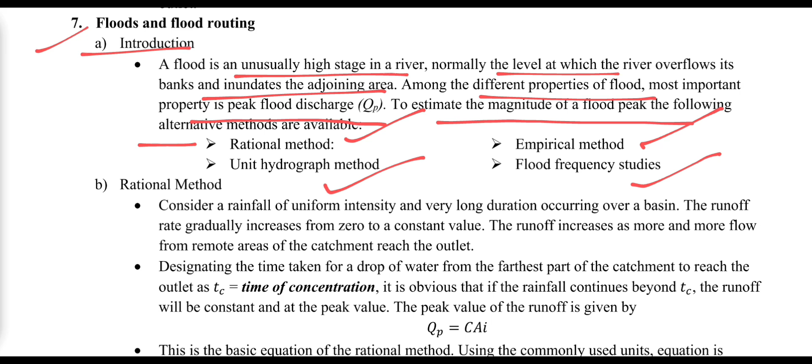To estimate the magnitude of the flood peak, the following alternative methods are available: first the rational method, unit hydrograph method, some other empirical methods, and flood frequency studies. These are the four types of methods available in order to estimate the flood peak, that is, the peak discharge.

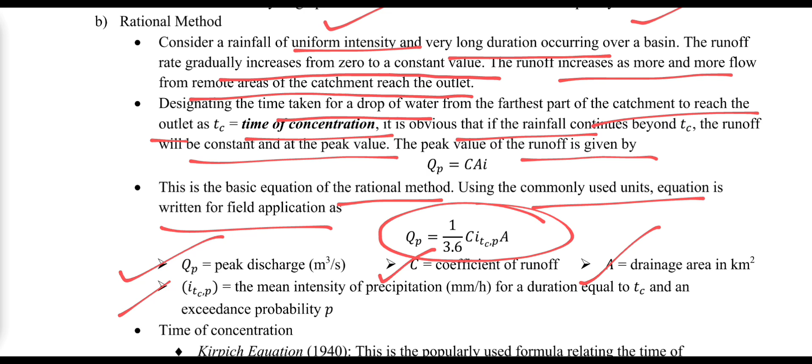Using the commonly used units, the equation is written for field application as follows. Here QP is the peak discharge in cubic meters per second, C is the coefficient of runoff, A is the drainage area or catchment area in square kilometers, and ITC,P is the mean intensity of precipitation in mm per hour for a duration equal to TC and an exceedance probability of P. This is about the rational method.

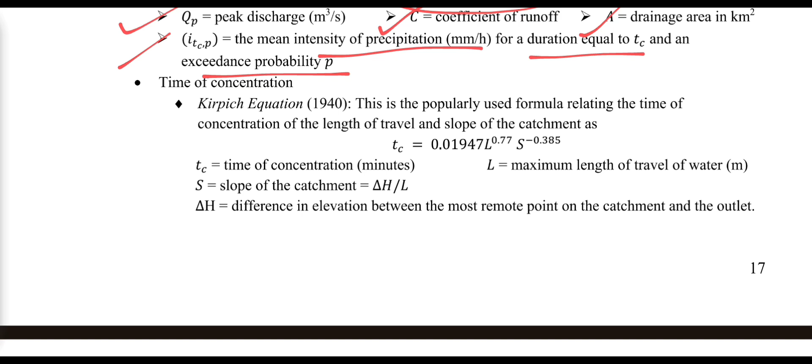Next, time of concentration: as we discussed in yesterday's class, we have the Kirpich equation to find the time of concentration. This is the popularly used formula relating the time of concentration to the length of travel and the slope of the catchment area. Here we go with the formula.

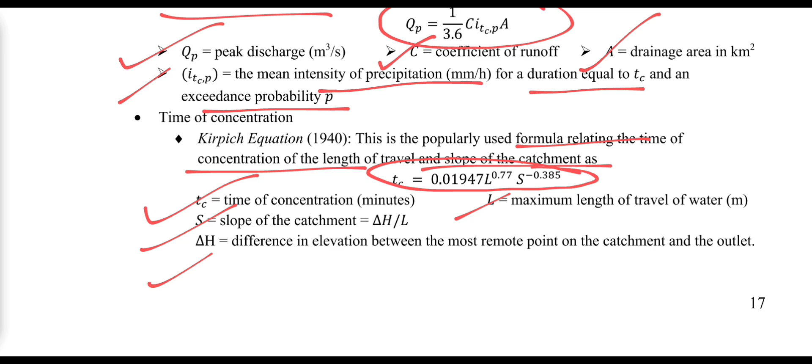This is the time of concentration formula as per the Kirpich equation, where TC is the time of concentration in minutes, S is the slope of the catchment, which is delta H by L, L is the maximum length of travel of the water in meters, and delta H is the difference in elevation between the most remote point on the catchment and the outlet.

Next, empirical formulas: in order to estimate the flood peak, we have some essentially regional formulas based on statistical correlations of the observed peak and important catchment properties. By far the simplest of the empirical relationships are those which relate flood peak to the drainage area in square kilometers. The empirical formulas include, first, Dickens formula, which is CD into A to the power of 3/4.

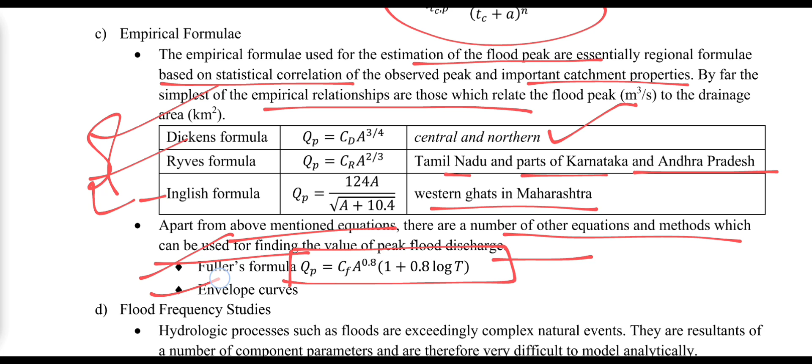Apart from the above mentioned equations, there are a number of other equations and methods which can be used for finding the value of the peak flood discharge. The Fuller's formula is QPK is equal to the given formula. Next, envelope curves. This is about the empirical formulas.

Next, flood frequency studies, the next method. In hydrologic processes, floods are exceedingly complex natural events. They are resultants of a number of component parameters and are therefore very difficult to model analytically.

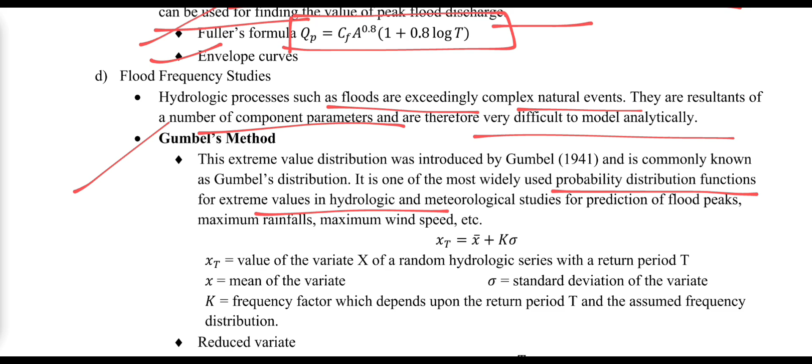This includes Gumbel's method. Generally, it is one of the most widely used probability distribution functions for extreme values in hydrologic and meteorological studies, for prediction of flood peaks, maximum rainfalls, and maximum wind speed, etc. We have to find this out.

Next, the statistical probability method. This method is suitable when a large amount of data is given and it is required to find the peak value of the discharge for a given period. The values of the annual maximum flood from a given catchment area for a large number of successive years constitute a hydrologic data series called the annual series.

The data are then arranged in decreasing order of magnitude. Then we find the probability P of each event being equal to or exceeded using plotting position equations. With the California formula, P is equal to M by N, where M is the order number of the event and N is the total number of events in the data.

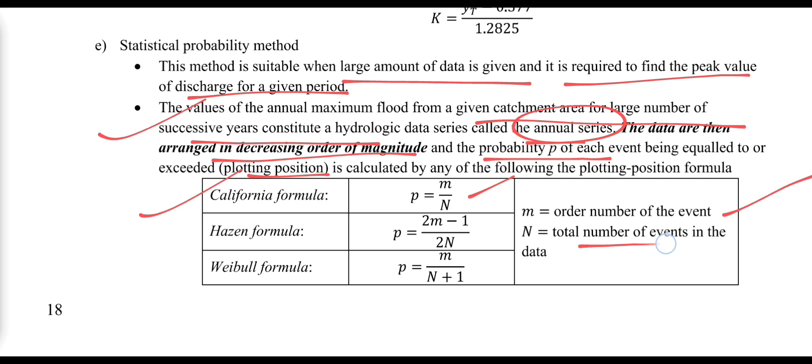With the Hazen formula, P is equal to 2M minus 1 by 2N. With the Weibull formula, P is equal to M by N plus 1. These are all equations. The recurrence interval, T, also known as the return period or frequency, is equal to 1 by P.

Next, reliability is the probability that a particular value of the flood is never equaled or exceeded in a time span of n years. The formula is R is equal to 1 minus 1 by T, whole to the power of N.

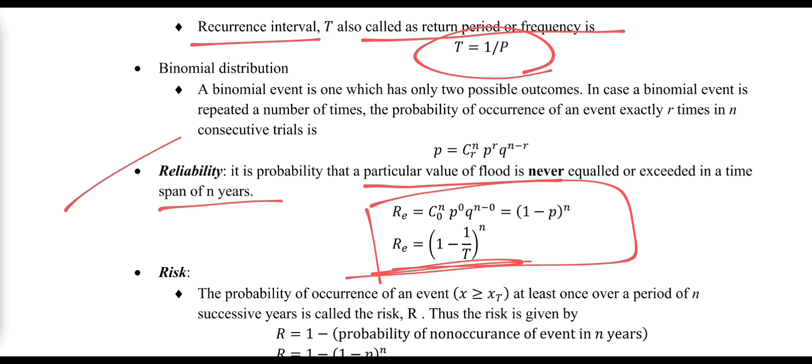Next, risk is the probability of occurrence of an event x greater than or equal to xt at least once over a period of n successive years. It is indicated by R. Risk is equal to 1 minus probability of non-occurrence. So the formula we use is R is equal to 1 minus of 1 minus 1 by T, whole to the power of n.

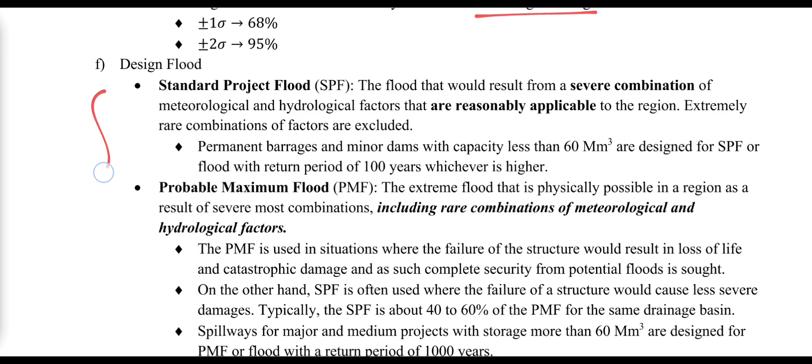Next, probability expressed in percentage is called dependability. It gives the percentage confidence for any event to lie within the given range. Next, design flood - how to design, you can go through all these things.

Flood routing is a technique of determining the flood hydrograph at a section of a river by utilizing the data of the flood flow at one or more upstream sections. The hydrologic analysis of problems such as flood forecasting, flood protection, reservoir designing, and spillway designing invariably include flood routing. In these applications there are two broad categories of routing.

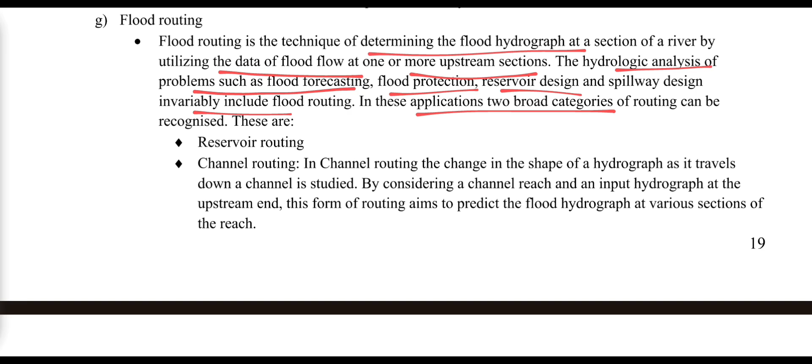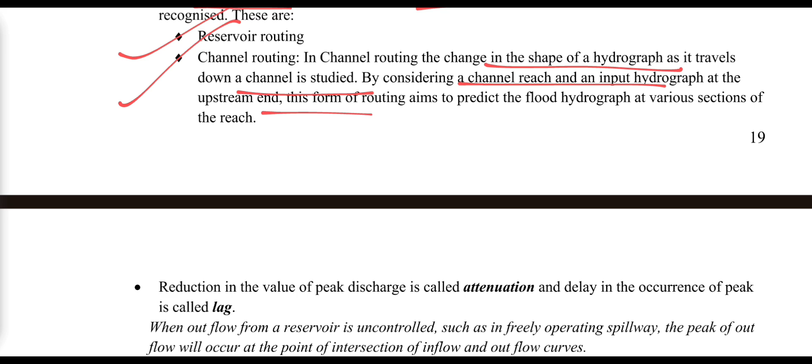These are reservoir routing and channel routing. Channel routing is the study of the change in shape of the hydrograph as it travels down a channel. By considering a channel reach and an input hydrograph at the upstream end, this form of routing aims to predict the flood hydrograph at various sections of the reach.

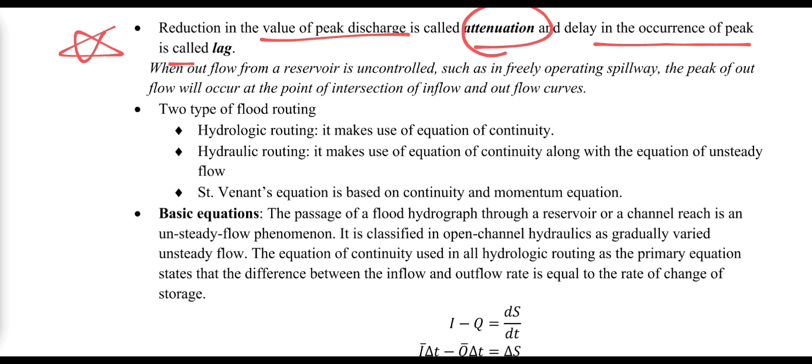This is important. Reduction in the value of the peak discharge is called attenuation, and delay in the occurrence of the peak is called lag - very important. There are two types of flood routing: hydrologic routing and hydraulic routing.

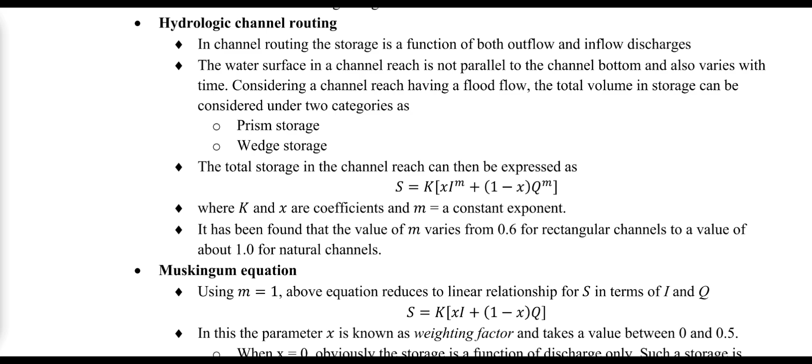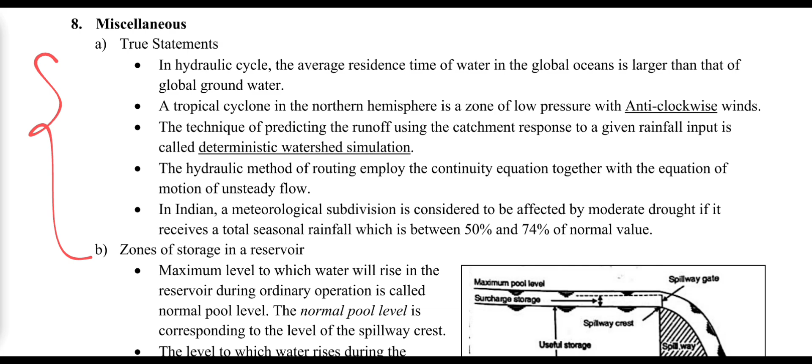Remember this: the zones of storage in a reservoir. First, the normal pool level. Normal pool level is the maximum level to which the water will rise in the reservoir during ordinary operation. It is also the level of the spillway crest. That is the normal pool level.

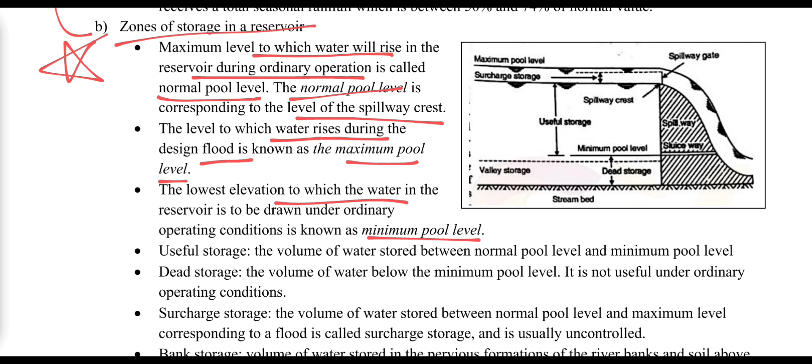Next, useful storage is the difference between the normal pool level and the minimum pool level. Next, dead storage is the volume of water which is stored below the minimum pool level. It is not useful for any ordinary operation conditions.

Next, surcharge storage is the volume of water stored between the normal pool level and the maximum level corresponding to a flood.

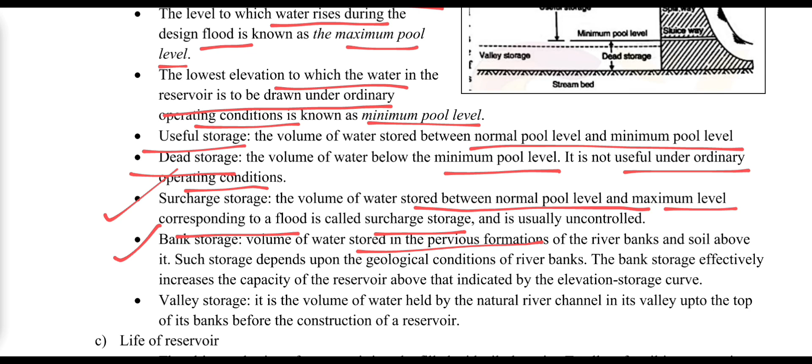Next, bank storage is the storage that occurs in pervious formations of the banks due to geological conditions, which we call bank storage. Next, valley storage is the volume held by the natural river channel valley up to the top of its banks before the construction of a reservoir.

Next, the life of a reservoir is given by the formula eta is equal to, where eta is the trap efficiency. Trap efficiency is equal to f into capacity by inflow.

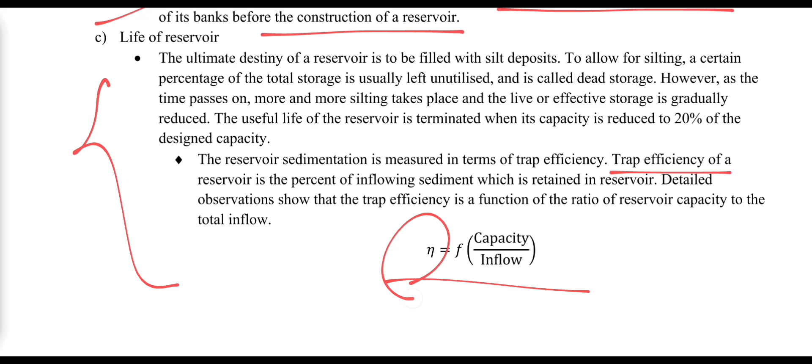Okay, this is about hydrology. We'll start another subject in the coming video.